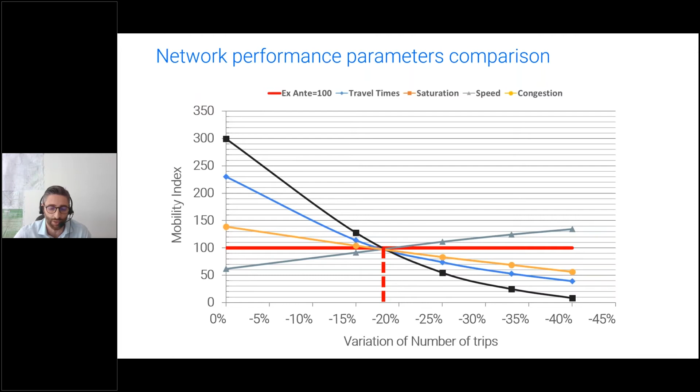So in this chart, we can see the difference. Just one moment. Okay, no problem.

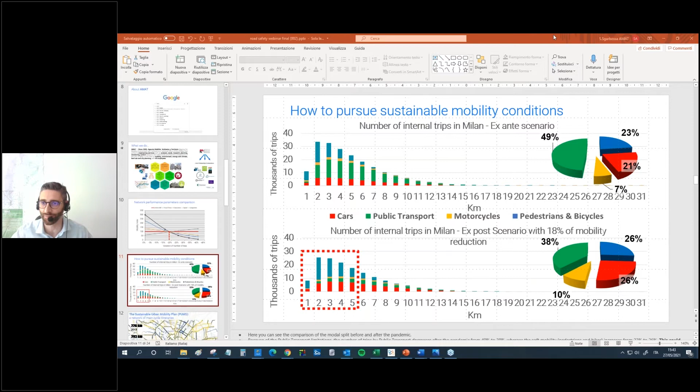Yeah, we can see your screen again. Okay, but I see my face instead of... okay. So here we are, sorry. No, it's the same. We can see the screen.

Here you can see the comparison of the modal split before and after the pandemic in the cake chart on the right part of the slide. Because of public transport limitations, the number of trips by public transport decreased after the pandemic from 49 to 38%. You can see it through the green slice in the cake chart on the right.

While soft mobility, so pedestrians and bikes, increases from 23 to 26%. This could seem so little, but through the histograms on the left, you can see how in the first columns, the shortest paths under 5 kilometers, the blue quota related to pedestrians and bikes increases more than the red one related to cars.

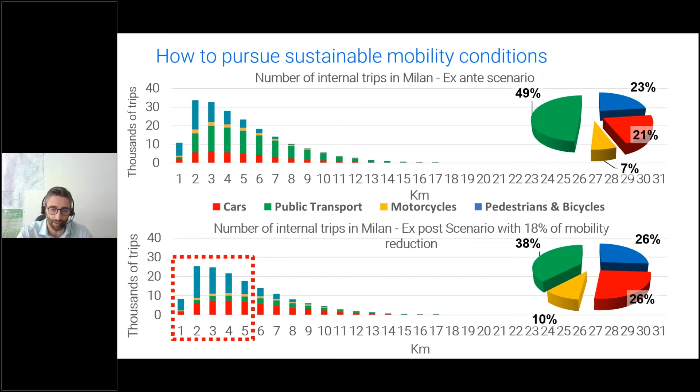So the Municipality of Milan, to encourage soft mobility related to short distance trips, started a new project called Strade Aperte. That means a network of new bike lanes, pop-up bike lanes. In the next chart, we can see that the choice of which new bike lane to draw by the municipality started from the current planning documents of the municipality, like the PUMS, Piano Urbano della Mobilità Sostenibile, or Sustainable Urban Mobility Plan, through which the City of Milan identified many cycle corridors.

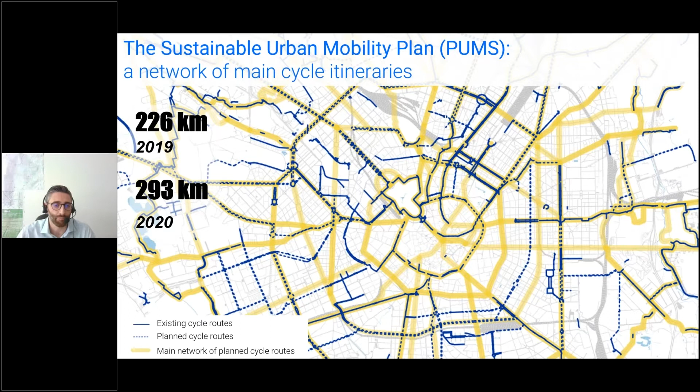So we passed from 226 kilometers in 2019 to 293 kilometers in 2020. At the end of 2020, we made 67 kilometers of new pop-up bike lanes, thanks also to changes in the national law that allowed drawing bike lanes that before were not permitted in our country.

We made it in this image. You can see the main cycling corridors made during 2020 in 2 different time periods.

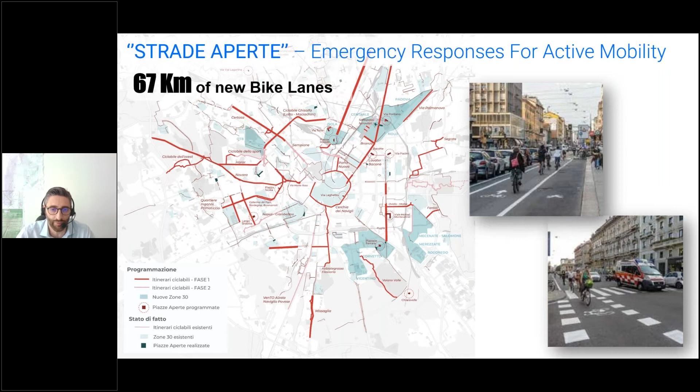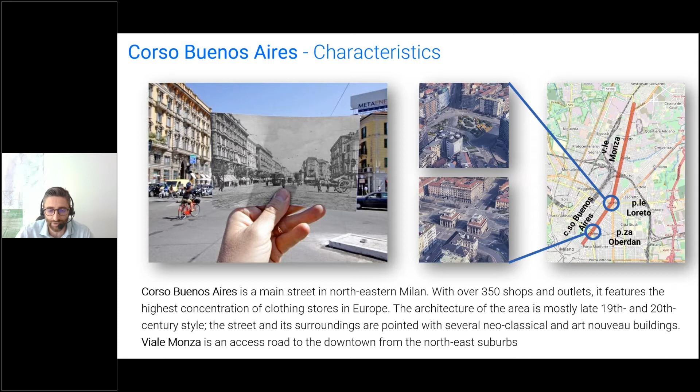Now we can focus on one of them, the corridor from Corso Buenos Aires to Viale Monza. Corso Buenos Aires is a main street in northeastern Milan, with over 350 shops and outlets and the highest concentration of clothing stores in Europe. The street and its surroundings are dotted with several historical buildings, and Corso Buenos Aires runs from Piazza Oberdan to Piazzale Loreto. Going toward the outskirts, the road is called Viale Monza, an important access road to the city.

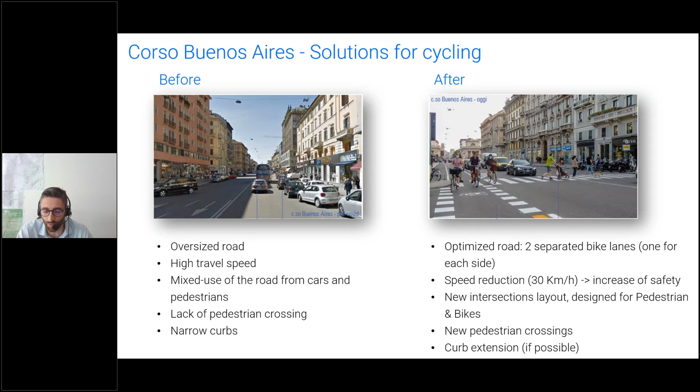In this slide, we can see the comparison between before and after the Strade Aperte project. Before, there were oversized roads, high travel speed, mixed use of the road from cars and pedestrians, lack of pedestrian crossings, and narrow sidewalks. After the realization of pop-up bike lanes, now we have optimized roads, 2 separate bike lanes (one for each side), a speed reduction to 30 km/h increasing safety, new intersection layouts designed for pedestrians and bikes, new pedestrian crossings, and an expansion of the sidewalks where possible.

After the realization of the pop-up bike lane corridor, a monitoring campaign began at several locations along Corso Buenos Aires and Viale Monza. It was recorded via Miovision Scout cameras and carried out using video processing technologies.

So those are the results. We can see that on the 21st of November 2019, the rate of bikes was only 5%, and after only 1 year it increased to 18%, with a maximum of 23% in September, and a workday bicycle average of 18%.

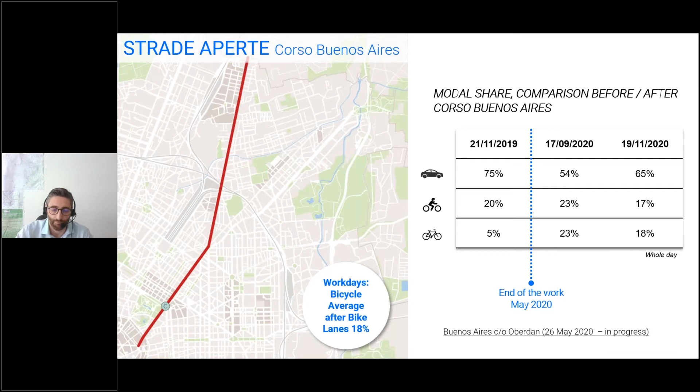In another spot on Viale Monza, we can see an increase of bicycles from 7 to 11% in a year, with a workday bicycle average of 14%. So all of these results bring us to continue the Strade Aperte project to meet the new mobility needs after the pandemic period. Thank you for your attention.

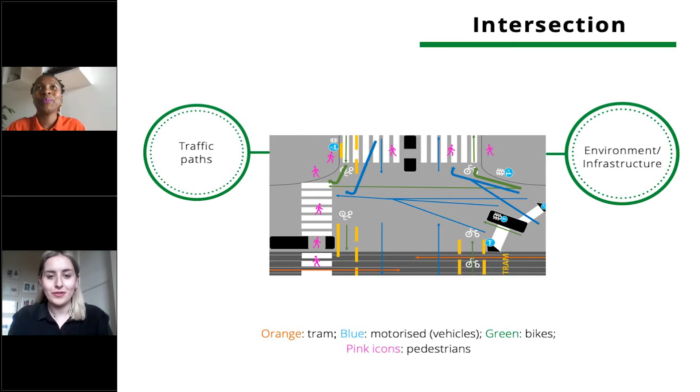Thank you very much, Leila, for the quick introduction. As Leila mentioned before, human factors are the central focus of our approach, and when it comes to road design and planning, it's also a very big key factor.

When we talk about human factors, we talk about a body of knowledge about human abilities, limitations, and other characteristics that are relevant to the design, planning, and study of systems and environments. In the human factor evaluation, we take into account the behavior of road users, their cognitive factors such as distraction or workload during driving, and we also take into account social and demographic factors such as gender and age when it comes to road accidents, for example.

There are a wide range of quantitative and qualitative data that can be assessed, and many methods that can be used. I'm not going to go into details on all of that right now, but I will give you a more in-depth insight into the observational methods for human behavior evaluation.

Before that, I will briefly mention the link between behaviors, infrastructure, and environment, because there is no doubt that infrastructure and environment can change or induce human behavior. Concerning behaviors, for example, transport mode choice, Stefano explained it well: when you install a new infrastructure, for example for bikes, more residents will tend to use the infrastructure and the given transport mode.

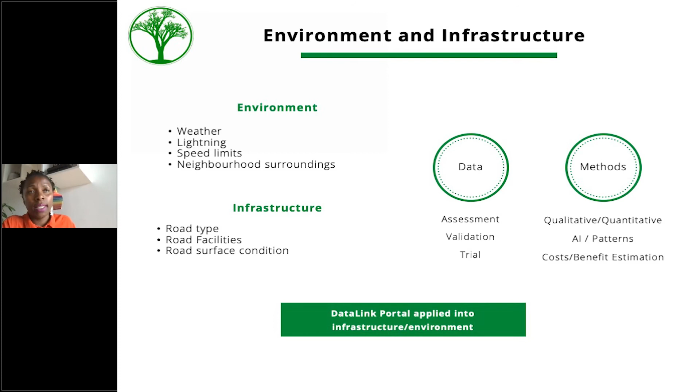And that is a great opportunity that we have through the use of data. On the next slide, please.

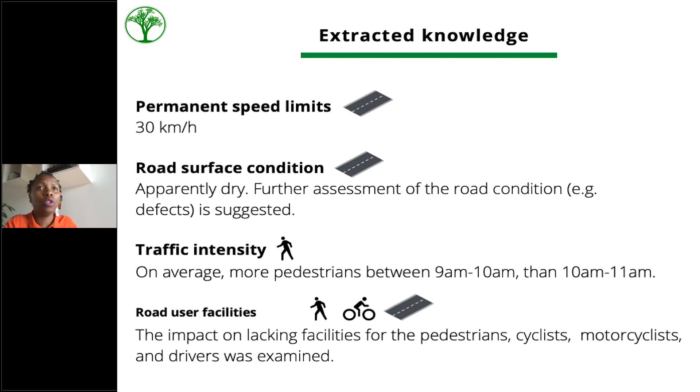This is a summary of the extracted knowledge where we share the permanent speed limits at the particular location was 30 kilometers per hour. The road surface condition apparently dry. Further assessment on the road condition, for example defects on the road, is suggested. The traffic intensity shows on average more pedestrians between 9 and 10 than between 10 and 11. And the impact on lacking facilities for road users is present, after having looked more into details on human behavior. Next slide, please.

And here we offer a portfolio of preventive measures that can be taken into account, such as creating bespoke pedestrian and bicycle lanes, assessing road quality on a regular basis, and considering speed limits, for example variable speed limits during peak time. We noticed that pedestrians were more present in some periods of time than others.

It's known that 20 kilometers per hour helps reduce accidents considerably. And there is a study that was conducted in São Paulo, Brazil, that gave an indication of the relevance of reducing the speed limit by 10 kilometers per hour.

Establishing the most adequate traffic calming measures based on the circumstances, and this proposal of introducing a roundabout - giving an overview, it's proven that in comparison to intersections, especially with more than 4 arms, roundabouts can reduce accidents by up to 20%. Next slide, please.

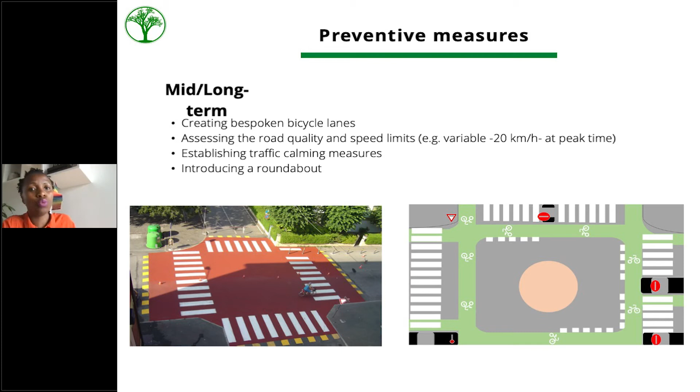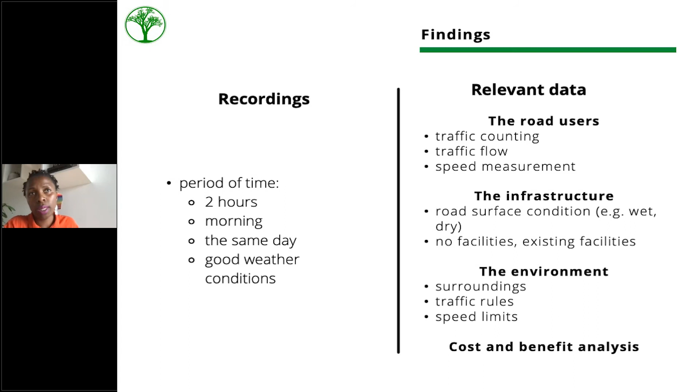I would like to share that this is an experimental study that lasted for 2 hours in the morning, on the same day, with good weather conditions. This is a sample that we took so that we could explore it, and looking further, there would also be further space to explore when it comes to future analysis.

Next slide, please. Our methodology takes into account, on the first stage, the pre-feasibility; the second stage, the advisory; the third, the implementation; the evaluation; and the fourth stage gives an opportunity to restart the operation - we call this a receptive methodology, which says every iteration becomes a better one.

Having said that, I thank you for your time. I hope that you enjoyed it as much as we did, and I hope to see you again. Thank you very much.

Okay, thank you very much. I very much appreciate that. Thank you all for your great presentation. And before we open up the room for audience questions, I'd like to get some additional insights on your presentations.

I just wanted to know what kind of recommendations you would give to people doing a road safety analysis. What should they consider? Which type of questions should they ask? Things like this. It's a very interesting question you make here.

I'm taking the space of the engineering infrastructure part, and I would say that the three key elements that we initially mentioned are crucial, and then it depends on their priority. It depends on what the road safety planner's vision is for the long term, and it's very important for us to consider that this is the long term - so what is it that you intend to achieve in the long term?